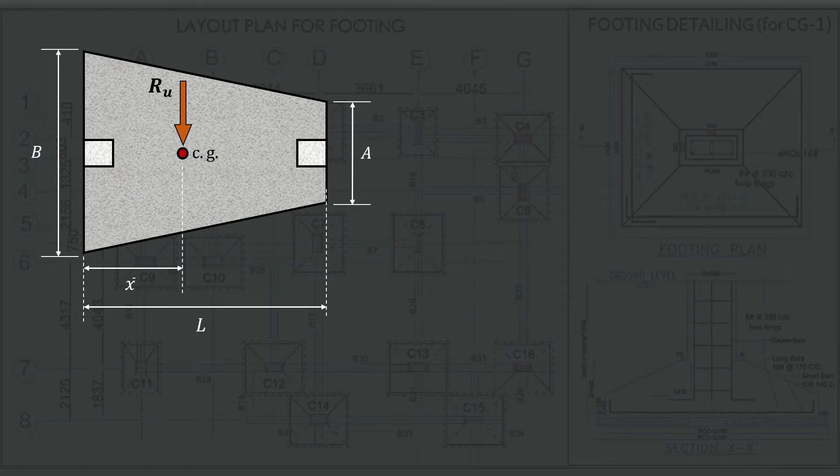We have here a derived formula for the x bar already. The formula for the x bar is simply equal to L over 3 times the quantity (B plus 2A) over (B plus A).

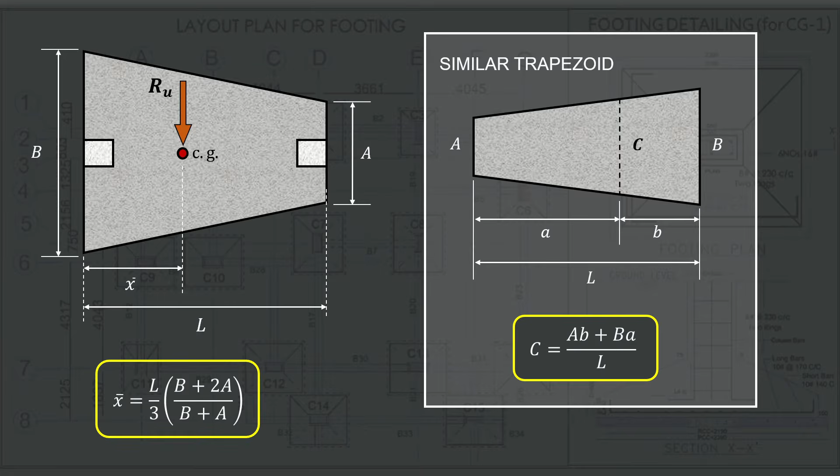And then, just as we have a similar triangle concept, we also have a similar trapezoid for this one. This is the concept behind the similar trapezoid, which we will use for the wide beam calculation and for the calculation of MU later on. We have here side A as the shorter width, and B as the larger width.

For example, let's get a cut section, and call this width C. The value of width C will be equal to A times the opposite side B, plus B times the opposite side A, all over L. So this will be the length C.

Next, for the calculation of QU, it's still the same - RU over the area of the footing. So RU, meaning it has the subscript 'ultimate', so this is the factored resultant.

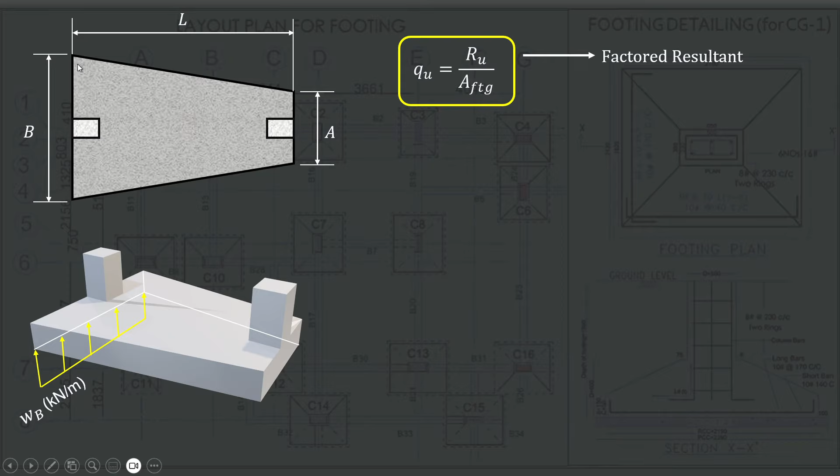For example, this is our isometric view for the trapezoidal footing. We have here what we call WB, which is the uniformly distributed load across width B, so this uniformly distributed load will pass through our side B. And then of course we also have WA, which is a uniformly distributed load that passes through our side A.

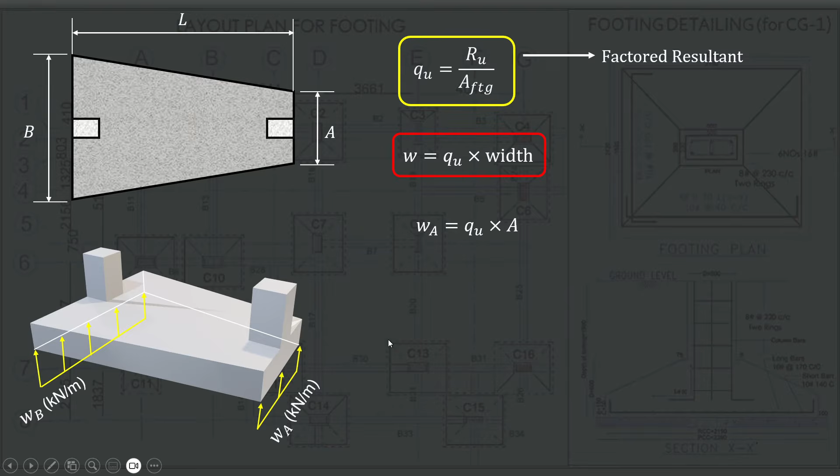To get the value of this uniformly distributed load, we have a formula to use, which is equal to QU times the width it is acting on. For example, for WA, we have QU times the width of A, which is simply side A. And similarly for WB, that is simply QU times B.

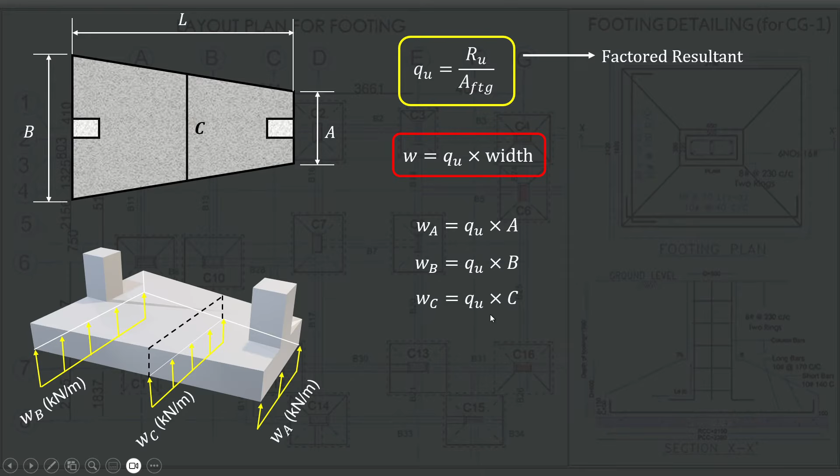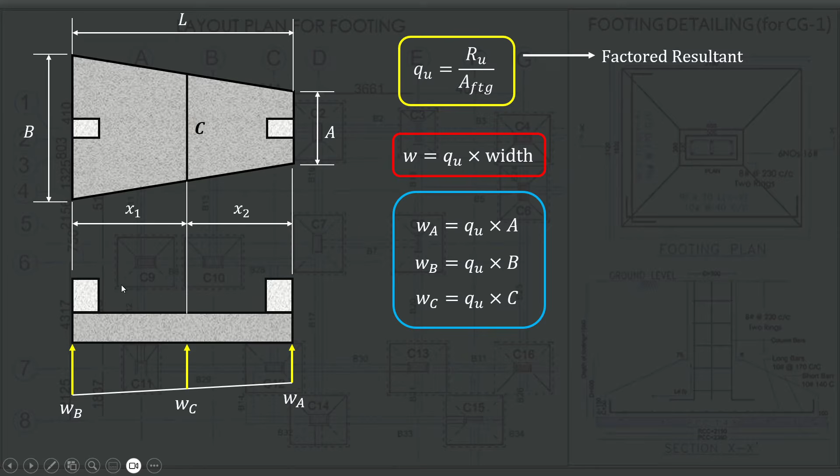Now, to get the resultant force produced by these uniform loads, let's draw a line so we can get the area later. Let's call the distance between WB and WC as x sub 1, and between WC and WA as x sub 2. So we derive here a formula for the forces.

The force that we will be using here is simply equal to the area of the trapezoid. Now, what is this area of the trapezoid? This is not the area of the plan view, our footing - rather, it's the area produced by WB, WC, and WA. For example, consider this area between WB and WC. If we notice, it is actually a trapezoidal shape - WB is one side and WC is the other side, and the distance, its length, will be x sub 1.

So the force produced by WB and WC, let's call it F1, and F1 will be equal to the area of this shape, which is 1/2 times (WB plus WC) times the quantity x sub 1.

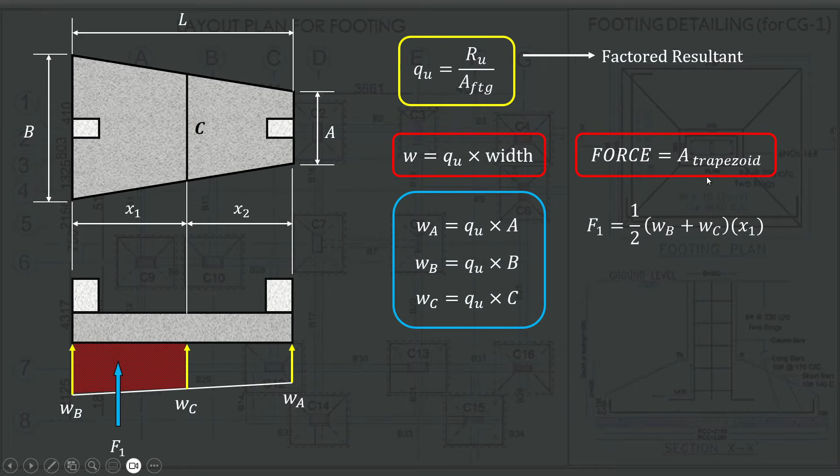That is the area of the trapezoid. So this is the trapezoid being mentioned here, not the area of the footing itself.

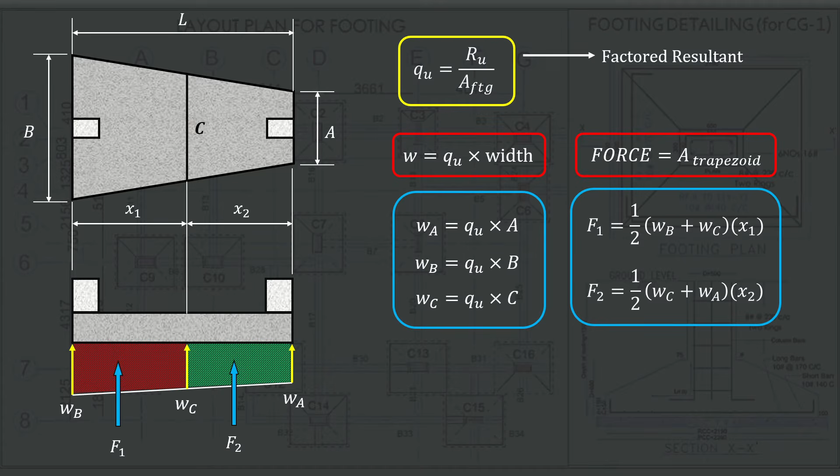Next, we have the other side. The components in this other area are the WC and the WA. Let's call this force number 2, and force number 2 will be equal to 1/2 times (WC plus WA) times X sub 2.

So this is the formula for the forces and the uniformly distributed loads. Be careful - these W's and forces are only used for wide beam and maximum moment. If the question is about punching shear or punching forces/stresses, we don't use this. We go back to the normal pressure, not uniform loads. That's the only difference here.

Example number 2: A trapezoidal combined footing is to be designed to carry the loads PD and PL acting at the center of the columns, which are 4.5 meters apart. Both columns are 400 by 400 mm, F prime is 20.7 and Fy is 276 megapascal. The allowable net pressure is 185 kilopascal. Use effective depth 450 mm. Column 1 has dead load equal to 850 kilonewton and live load 650 kilonewton. Column 2 has 650 and 450 kilonewton dead and live respectively.

Determine: A) the minimum dimension of A and B for the footing. B) factored shear force for the wide beam at column 1. C) the punching shear force acting at column 1. D) the maximum moment acting at the footing.

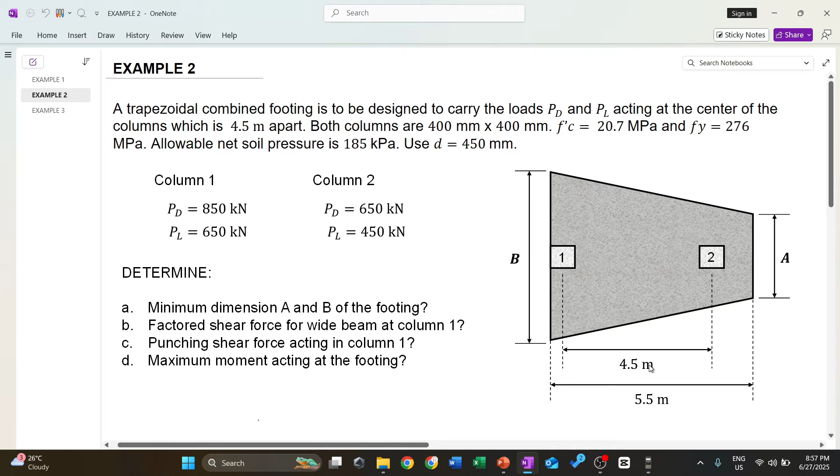So we have here the plan view of the trapezoidal combined footing. Side B here with column 1 adjacent to side B, then column 2 as the interior column. They are 4.5 meters apart and the length of the footing is given as 5.5 meters.

First we rewrite all the loads - the service loads and the factored loads. I already summarized the values here. P1 is simply PD plus PL, that is 850 plus 650, which equals 1,500. For P2, that is 650 plus 450, which equals 1,100 kilonewton. The resultant for the service loads is simply P1 plus P2, which equals 2,600 kilonewton.

Next for the factored loads, P1U - let's add subscript U for ultimate - that is now 1.2 times dead plus 1.6 times live, equal to 1.2(850) plus 1.6(650) equals 2,060 kilonewton. P2U is 1.2(650) plus 1.6(450), which equals 1,500 kilonewton. For the ultimate resultant, that is P1U plus P2U, which equals 3,560 kilonewton.

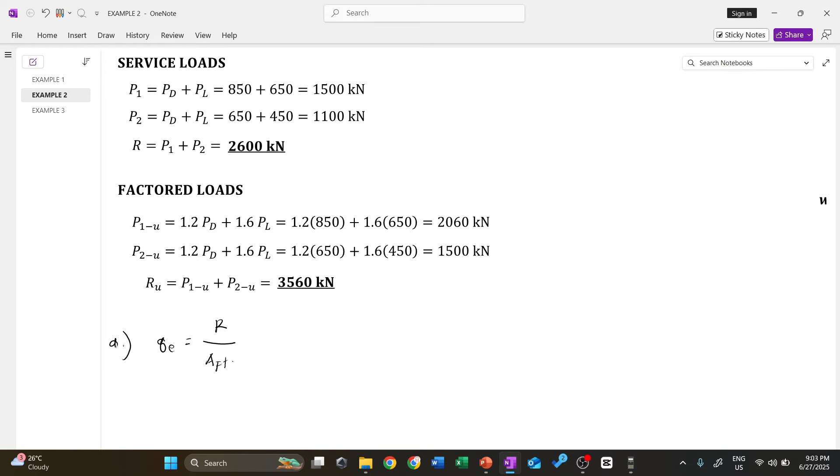Now the question in letter A is the dimensions, side A and side B of the foundation. For the dimension, we need the effective soil pressure. For letter A, we use: effective pressure equals resultant divided by the area of the footing. The effective value is already given, though the word used here is net soil pressure - when we say net pressure, that is effective. So the effective here is simply 185 kilopascal, that's what we'll use.

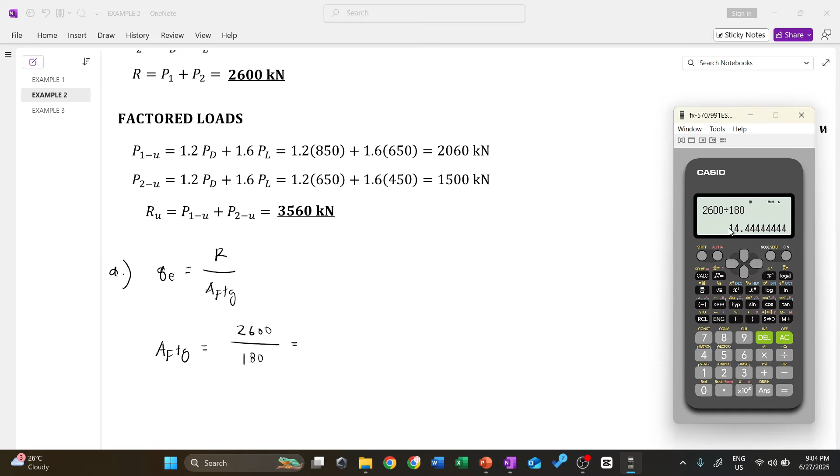That's what we'll use here. And R here must be the service load since it's effective, so 2,600 is what we use - careful, don't use 3,560. So we can now get the area of the footing. The area of the footing is simply equal to R, that is 2,600 divided by the effective pressure, which is 180 kilopascal. The area of the footing is now 2,600 divided by 180, which equals 14.44 meter square.

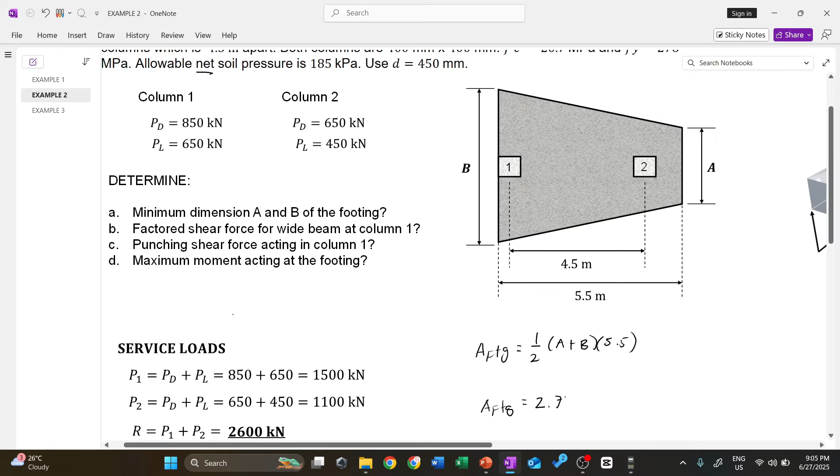Now, what is the area of the footing here? Since this is trapezoidal, we can derive the area of the footing. The area of the footing is simply equal to 1/2 times (Base 1 plus Base 2) times the length. Let's call Base 1 as A, Base 2 as B, with a length of 5.5 meters. So we can say the area of the footing is equal to (A plus B) times 5.5, divided by 2. Simplifying, divide 5.5 by 2, we get 2.75. Distributing inside: 2.75A plus 2.75B. So this is our area of the footing.

Now we can equate this. So 14.44...

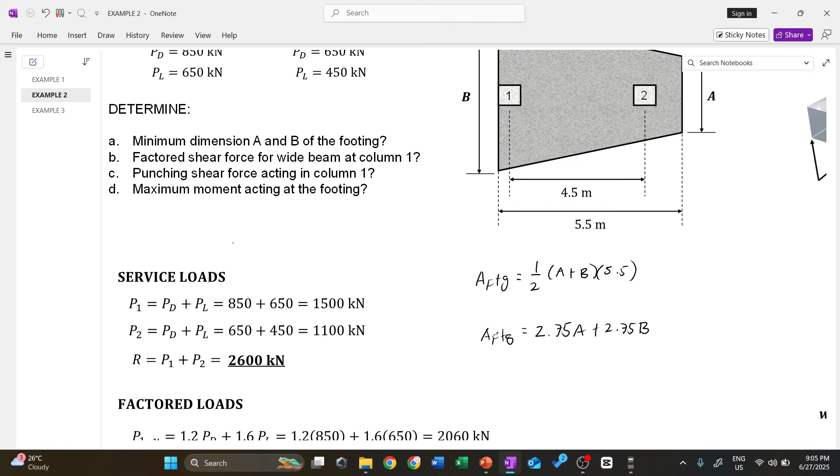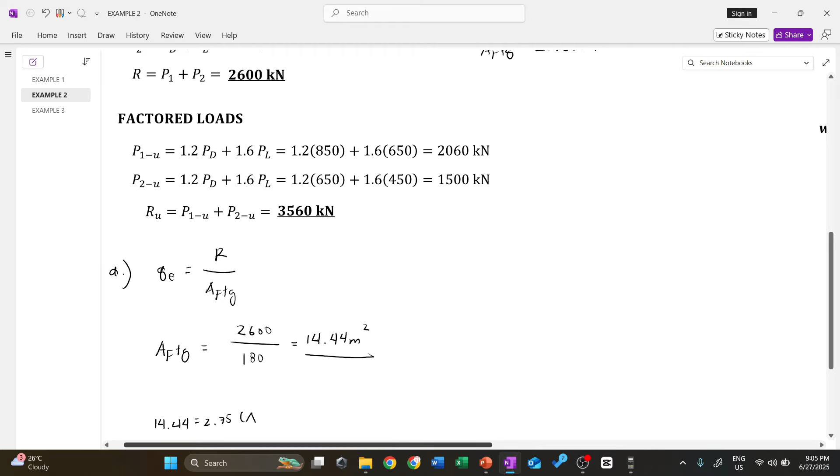14.44 is actually equal to 2.75, or let's isolate A plus B first. Now, we can simplify this further by dividing 14.44 by 2.75. So we get 5.25 here.

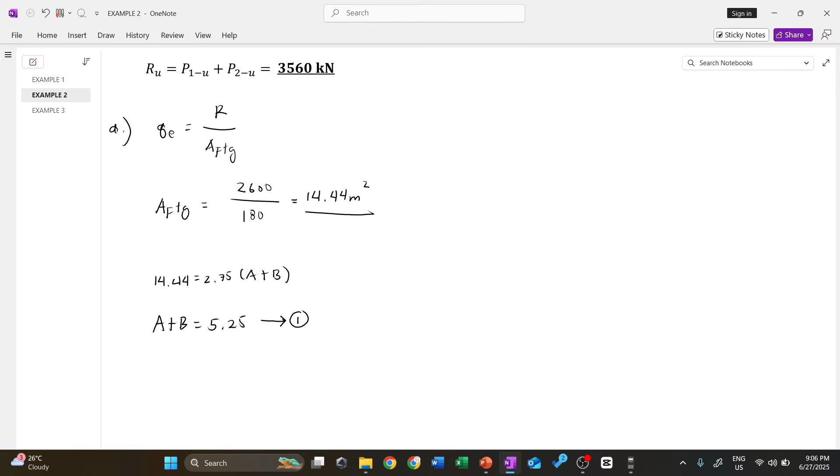Now for the next equation, let's recall the distance of our resultant from a reference. So again, if we have a resultant, the distance of this resultant from the larger side, side B, is what we call x-bar. And our derived formula here is simply L over 3 times the quantity B plus 2A, over B plus A. This is what we'll use.

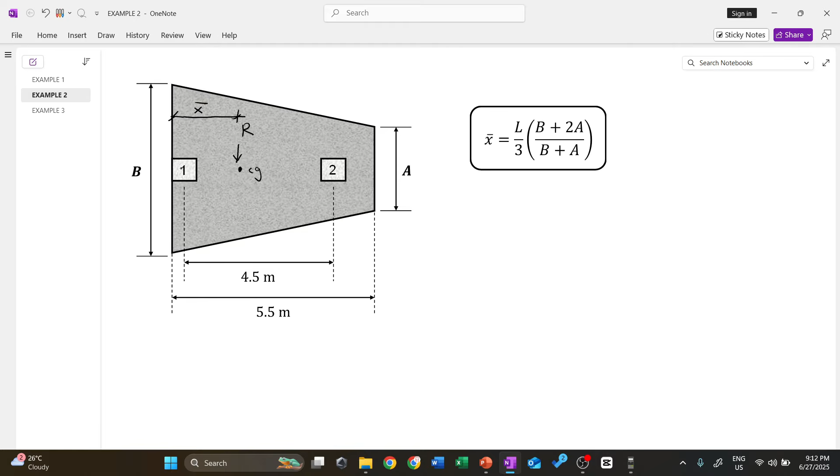Now what's the purpose of this? Remember that at the center of column 1, we have P1, and at the center of column 2, we have P2. So the purpose of our x-bar here is that the moment of the resultant, that is resultant times x-bar, meaning our reference here at side B, must be equal to the moments produced by the two axial forces. Meaning P1 times its distance from the reference.

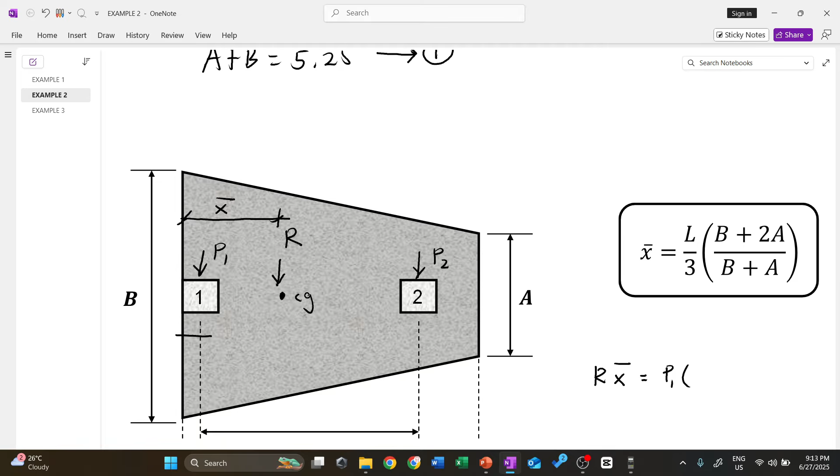Again, if you remember, the column dimension is 0.4 by 0.4, so this one is 0.2 meters. So that is P1 times 0.2, plus for column number 2, its axial load P2, its moment arm from our reference is simply 4.5 plus 0.2, or 4.7 meters.

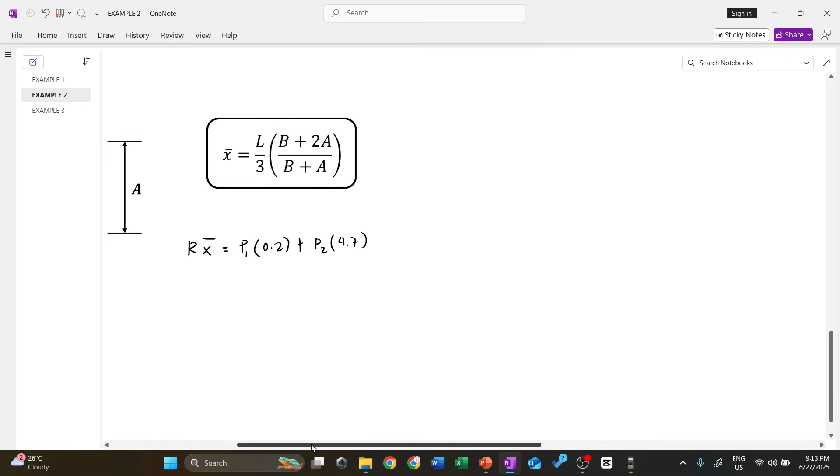So that's what this means: the moment of the resultant is equal to the moments of our axial loads. So our R here is the service load, that is equal to 2,600, times our x-bar which is equal to L over 3.

Our L here is 5.5, divided by 3, times B plus 2A over B plus A -- that's still unknown. And this is equal to our P1. The P1 here is simply equal to 1,500 and P2 is 1,100.

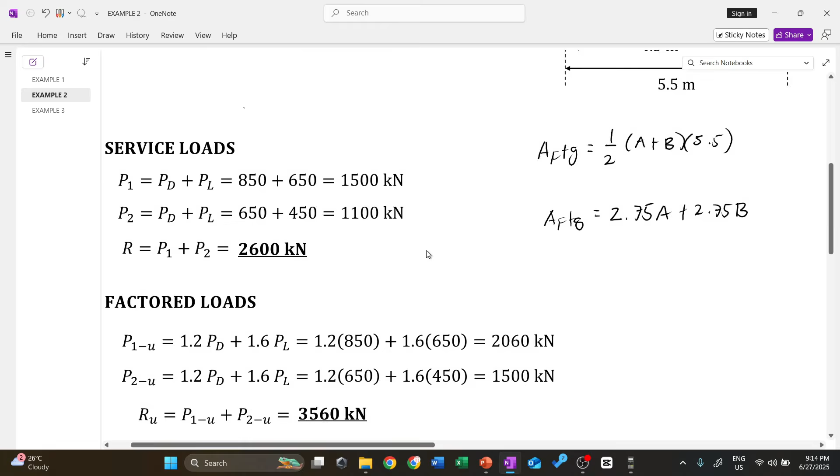So P1 is 1,500 times 0.2 plus 1,100 times 4.7. We can simplify this further. Let's leave B plus 2A on the left side of our equation.

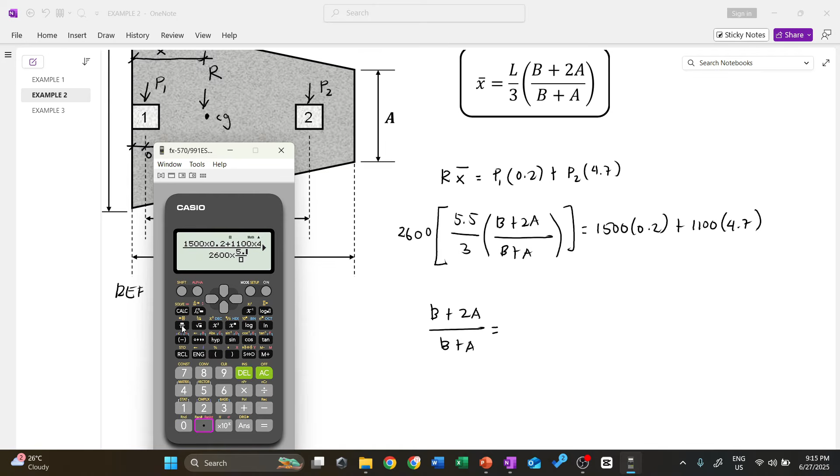B plus 2A over B plus A, and this is equal to -- let's simplify the right side. That is 1,500 times 0.2 plus 1,100 times 4.7, all over 2,600 times 5.5 over 3. So we get a value of 1.148.

And then let's expand this further, let's simplify it more. We have B plus 2A is now equal to 1.148B plus 1.148A. So let's combine these.

Let's move the terms on the right to the left instead. Let's take A first: 2 minus 1.148, that is now equal to 2.148 -- wait, we have 0.852A. Then next, B minus 1.148, so we have negative 0.148B, and this is equal to 0.

Let's call this our equation number 2. So we now have equation 1 and equation 2. We can now use these two equations in our calculator's two-unknown equation solver.

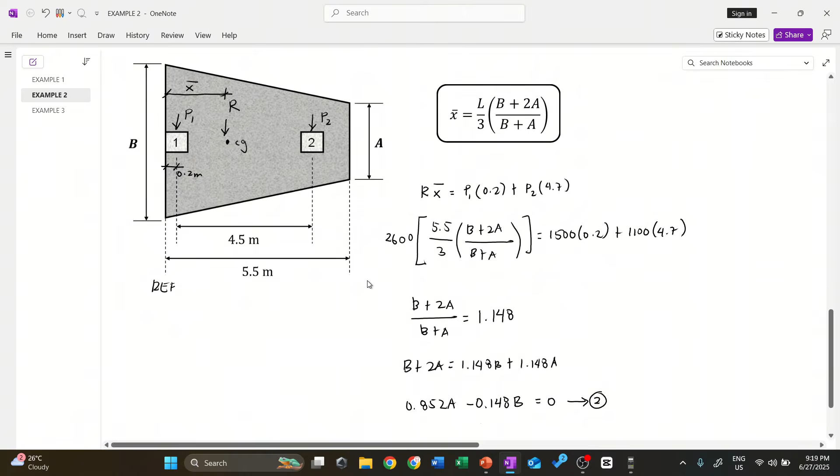So, mode, equation, then 1. First, we have 1, then our C is equal to 5.25 -- it should be equated on the right side. And then here, we have 0.852 and negative 0.148, and then 0 for the C. Let's equate these.

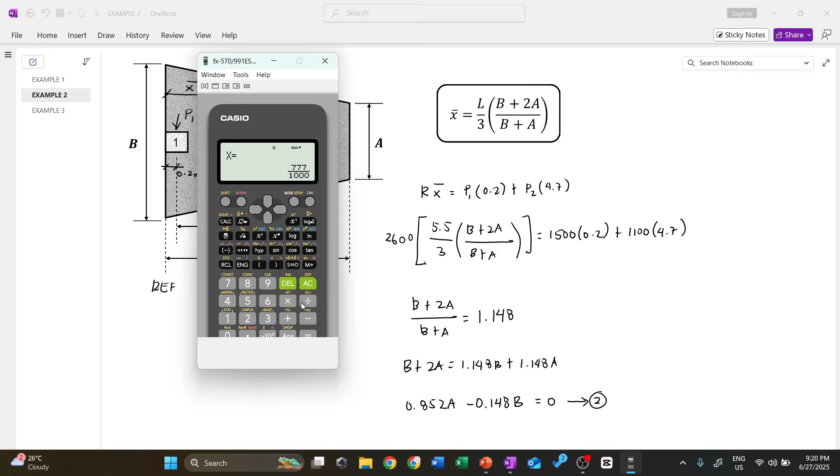So we now have side A equal to 0.777 meters, and for side B, we have 4.473 meters. But we don't want it to look like this, so we can round off to 0.8 meters, and this one we can say is 4.5 meters. So this is what we'll adopt as the answer for letter A.

Okay, next, letter B: the factored shear force for the wide beam at column 1. So when we say factored shear force, since it has the word factored, what we'll use here should be factored loads too. So it's the VU that will be produced by the factored loads under the foundation.

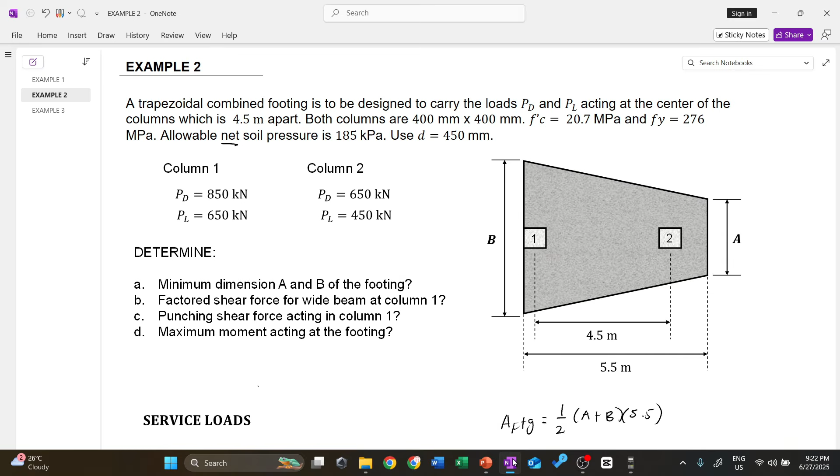Again, for the wide beam force or stress in our trapezoidal combined footing, this is what we'll do. This is what it should look like -- we need the WB and the WC here, and of course, we still need the P1 here, it should still be visible.

Acting on it. So for example, this is cut off because of the wide beam force or wide beam stress. Again, because this is a wide beam, we'll measure this by distance D from column number 1, since that's what's being asked here.

And then yung D distance natin dito, say for example, meron tayo ditong magiging width na C. So ito na yung width C natin para sa ating trapezoid for the wide beam. So what is the value of C? Take note that the value of C is simply equal to A times its opposite side na B, plus B times its opposite side na A, divide this by the length.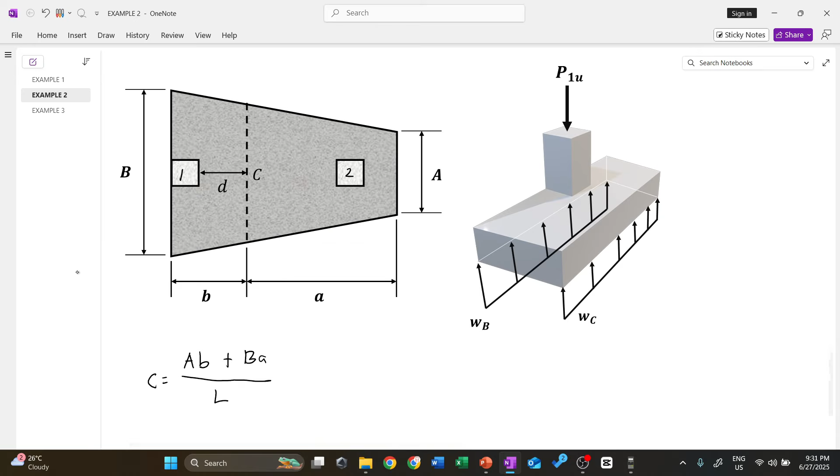Yung C natin dito ay hindi pa natin alam, pero pwede naman tong masolve. Yung B natin dito, nakalculate na natin as 4.5. Yung side B natin ay 4.5 and then yung side A natin ay 0.8 meters. And then what is side B? What is this small side A naman dito?

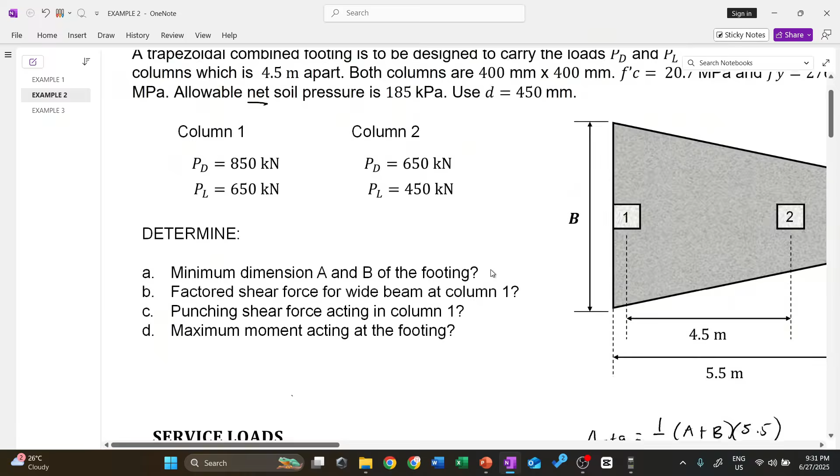Remember that the column dimension is 0.4, and the effective depth is already given. So the effective depth here is 450 mm or 0.45. Kung meron tayo ditong 0.4 and then another 0.45, side B is actually equal to 0.85. This is the smaller side. And kung 0.85 na yan, yung naiwan na lang kay side A is of course 5.5 minus 0.85. So for side A, meron tayo dito na 4.65 meters. Kompleto na ito, pwede na natin kunin yung side ni C.

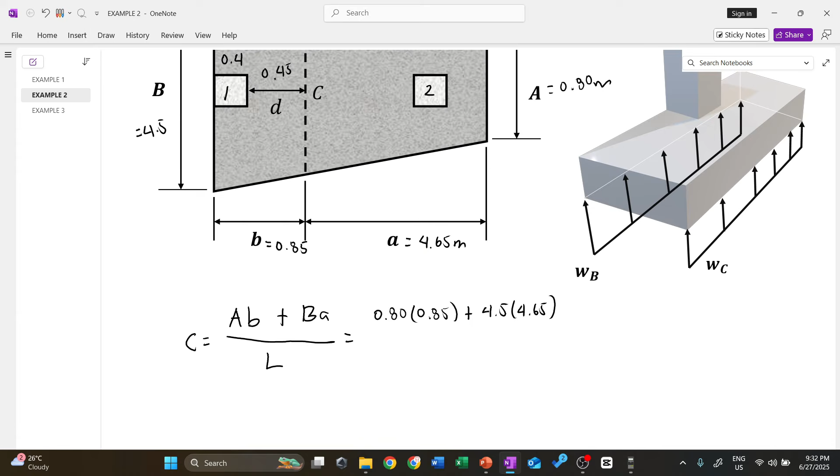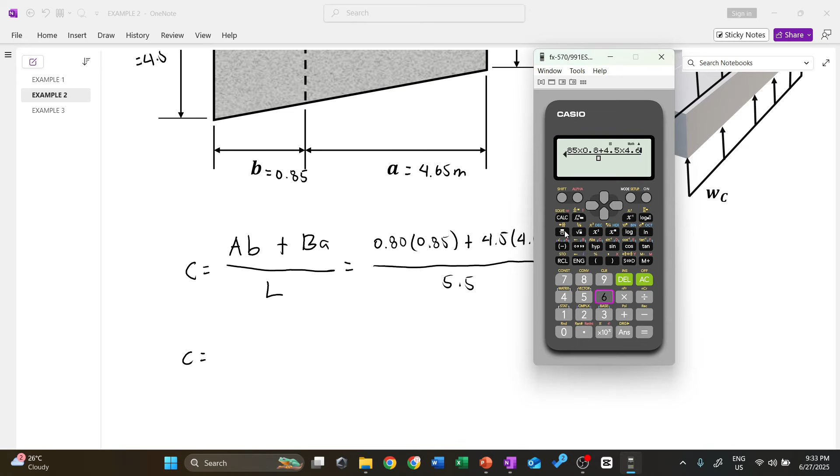So C natin is 0.8 times 0.85 plus 4.5 times 4.65, divide this all by 5.5. Side C is equal to 0.8 times 0.85 plus 4.5 times 4.65, then divide this by 5.5. That gives us 3.93 meters. So this will be our side C.

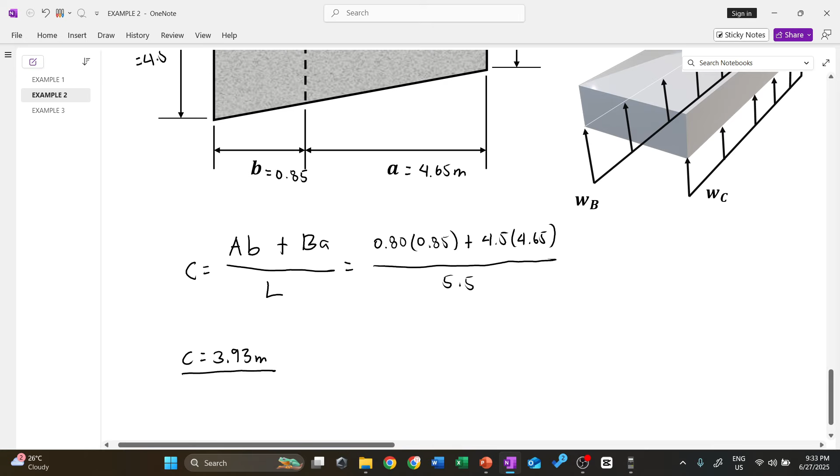Kung meron na tayong side C, pwede na natin kunin yung mga WB and WC. Para masolve natin yung WB and WC, we need the pressure ultimate muna. So QU is equal to RU divided by the area of the footing. So what is our RU here? The RU is 3560 kilonewton.

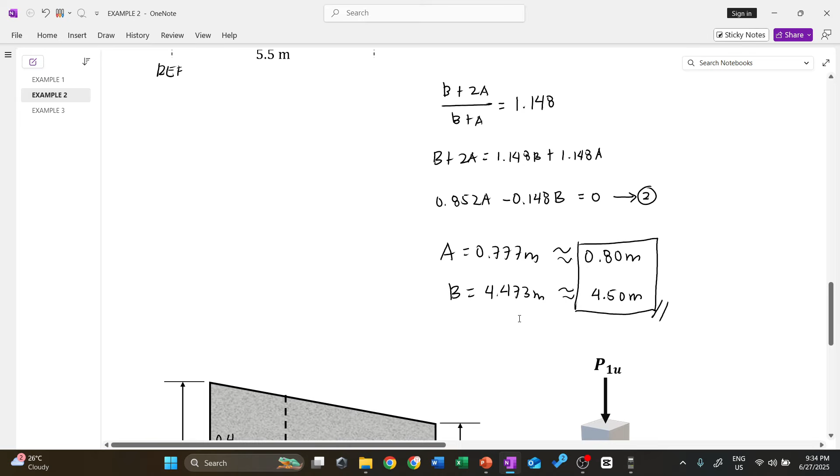Hindi yung 14.44 yung gagamitin natin, rather yung na-derive na natin na bagong dimensions using 0.8 meters and the 4.5 meters na sides. Kasi kung 14.44 yung gagamitin natin, maliit na yan. 1/2 times yung side A natin na 0.8 plus yung side B natin na 4.5, and then with a length of 5.5. Ito yung magiging bagong area natin using the new dimension or the rounded dimension. So yung QU natin dito ay simply equal to 3560 divided by 0.5, 5.5 times 0.8 plus 4.5.

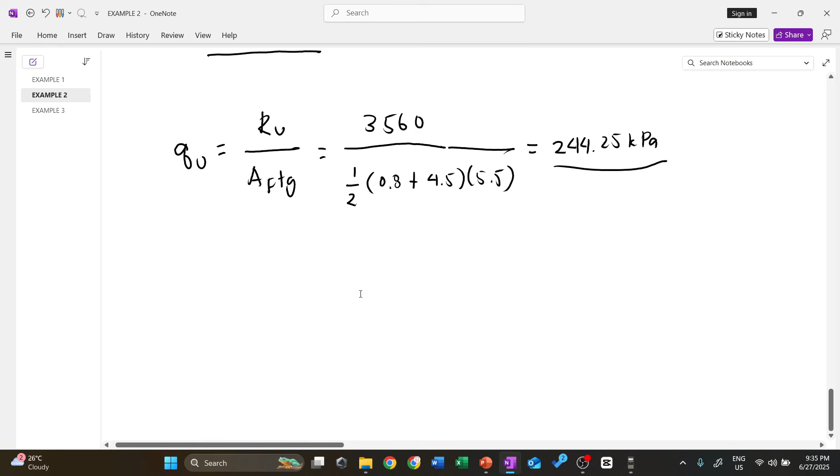That gives us 244.25 kilopascal as our QU. So finally, pwede na natin kunin yung values ni WB and ni WC. Dito na lang siguro. So WB here is simply equal to QU times the side B. Then WC naman ay QU times the side C.

So 244.25 times yung B natin dito is 4.5 meters. Meron tayong uniformly distributed na 244.25 times 4.5. So we have here 1,099.125 kilonewton per meter.

For the side C naman, or the WC, we have here 244.25 times yung side C natin na 3.93. So we have here 959.9025 kilonewton per meter. Meron na tayo ditong mga WB and WC.

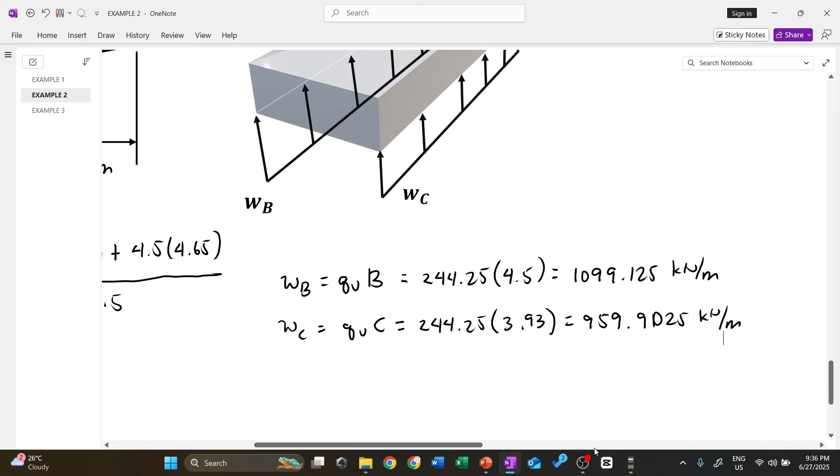Para makuha na natin yung factored shear force for the wide beam near the column number 1, ito yung mga kailangan natin na mga figures. Nire-write na natin dito yung values ni WB and WC. Meron tayo dito nung kanyang elevation view naman. Para makuha natin yung VU produced by this cut, meron tayo ditong lalabas na VU. Ito yung tinatanong na factored shear force for the wide beam.

Para makuha yan, kailangan din natin muna ng resultant nitong mga pressure natin or itong mga uniform loads natin sa ating pundasyon. Meron tayo ditong resultant nitong WB and WC. Tawagin natin yun as the force F na lang siguro. Now, to solve the VU produced by this section, we have summation of forces vertical equal to 0. Lahat ng upward forces ay equate lang natin sa mga downward forces. From this one, we can say that yung mga upward natin ay yung VU and the F, and yung downward ay yung P1U.

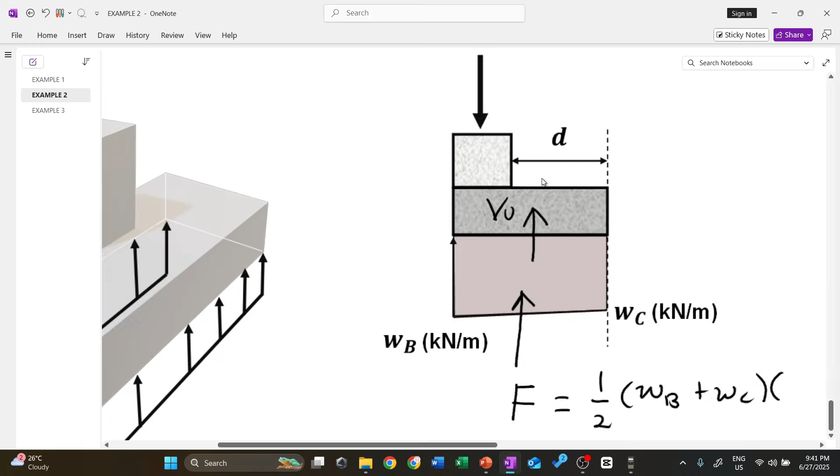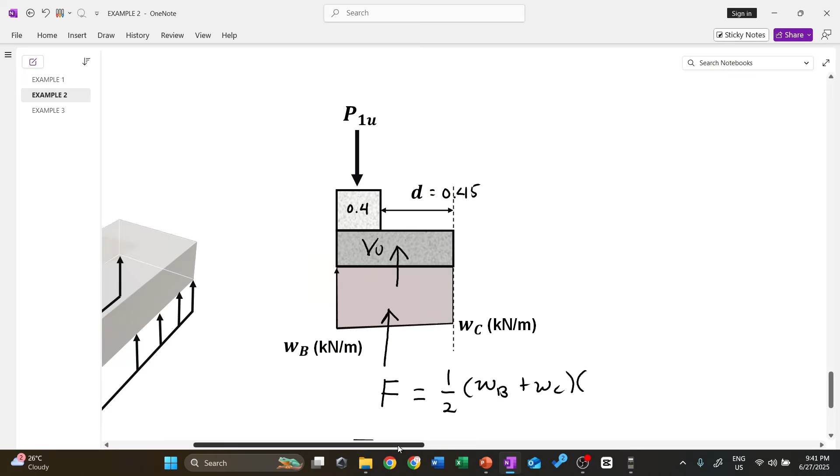Rewrite natin dito, VU plus the F is actually equal to the P1U. Now, ano yung value naman nitong F dito? F dito, if you remember, this is simply the area of the trapezoid. Ano yung trapezoid? Yung trapezoid na nabubuo ni WB and ni WC. This is simply equal to 1/2 WB plus WC times yung kanyang distance na 0.85. Meron tayo ditong column dimension na 0.4, tapos yung ating effective depth na 0.45. So meron tayong width na 0.85. Yun lang yung times natin dito, 0.85.

Now, solving for F, this is equal to 1/2 times WB natin na 1099.125, WC natin na 959.9025, times yung distance natin na 0.85.

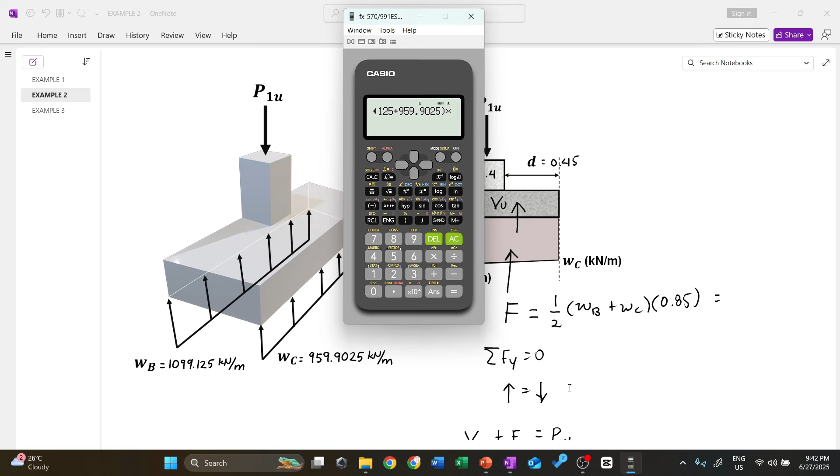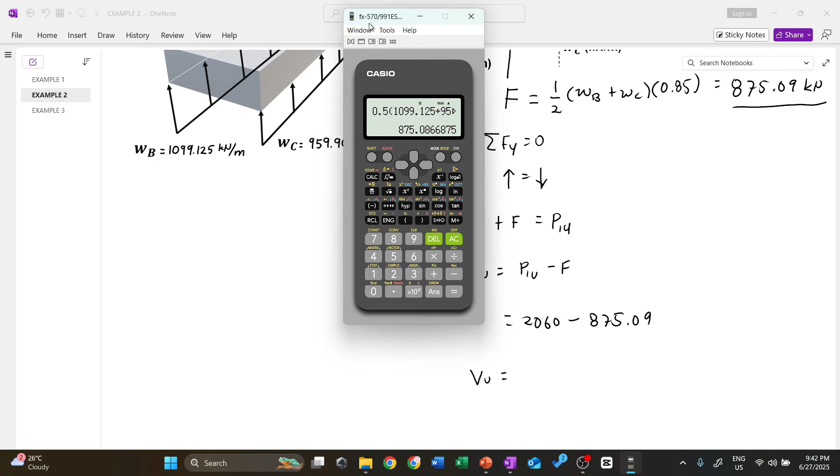875.09 kilonewton. So para ma-solve natin yung VU, this is now equal to P1U minus F. Yung P1U natin ay 2060 kilonewton minus 875.09. Ang ating factored shear for the wide beam ay simply equal to 2060 minus the answer, meron tayo ditong 1184.91 kilonewton. Ito na yung sagot natin for letter B.

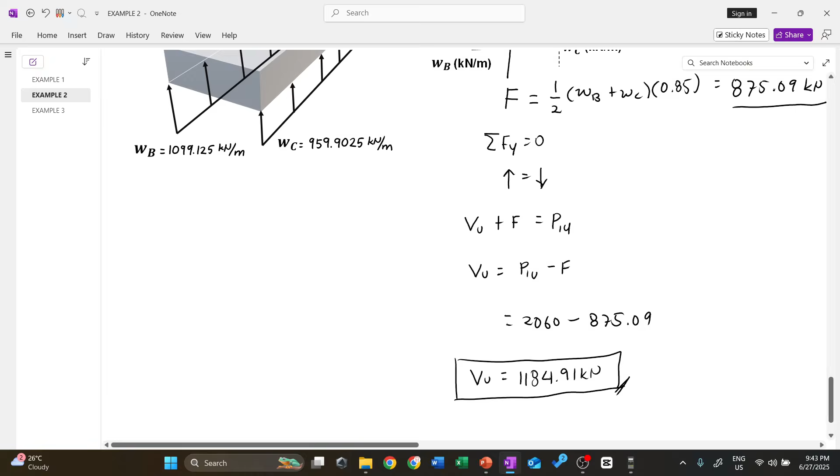Next, what is the punching shear force acting in the column number 1? Alright, for the punching naman, ganito na yung mangyayari dito sa ating trapezoidal footing. Dahil column 1 pa rin naman, so magsukat lang tayo ng d/2 distance all over the faces of the column number 1. Kung mapapansin natin, ang column 1 ay adjacent to the property line, so wala nang masisira dito sa point na to. Hanggang dito lang yung masisira, D/2 from the 3 faces.

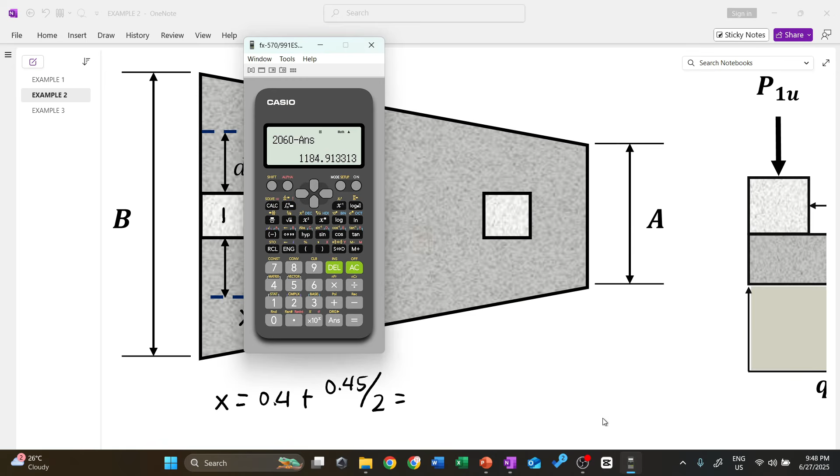Tawagin na lang natin itong mga x distances or x dimension, and this one as our y dimension. Yung value ng x dito is simply equal to column dimension 0.4 plus D/2. Yung D natin again ay 0.45 meters, then divide this by 2. So yung x natin dito is simply equal to 0.4 plus 0.45 divided by 2, meron tayo ditong 0.625.

0.625 meters. At para sa y naman, meron tayo ditong D/2 and then D/2 sa baba, so that is actually dalawang D/2, plus column dimension which is 0.4. Cancel na dito yung ating 2, so D is 0.45 plus 0.4, or this is equal to 0.85 meters.

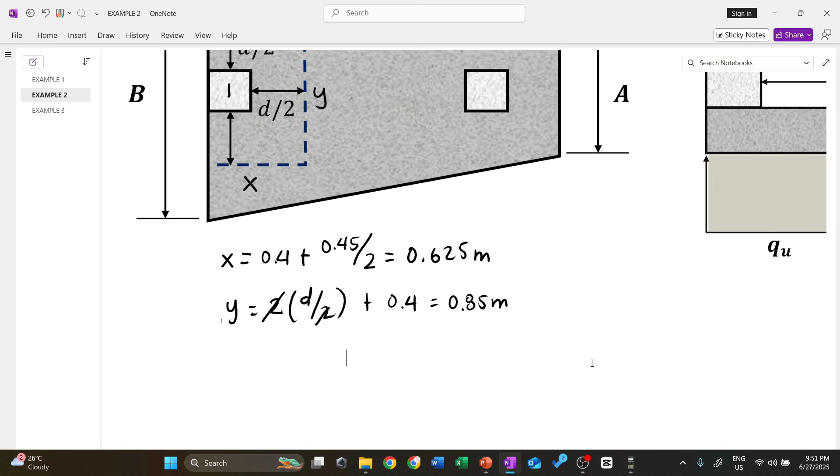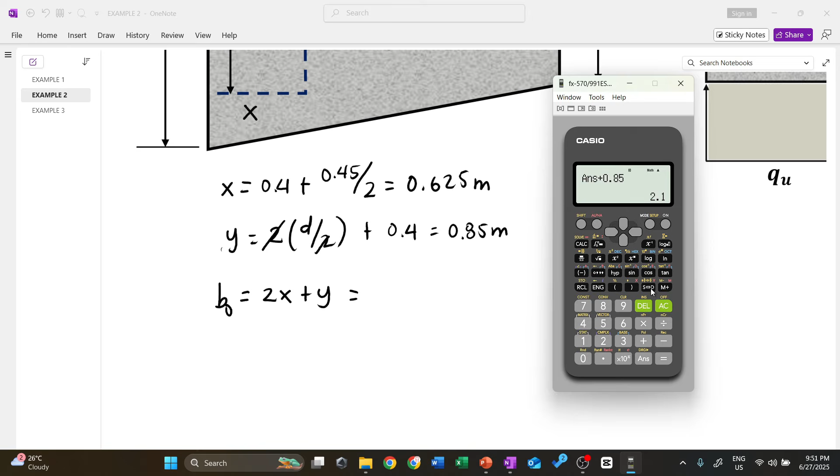Then finally para sa perimeter naman, that is BO, meron tayo ditong dalawang x sa baba, x sa taas, then plus y. Ang perimeter natin para dito ay simply 2x plus y. So this is 2 times 0.625 plus 0.85, times 2 lang natin ito, plus 0.85. So we have here perimeter equal to 2.1 meters. Ito na yung section na masisira because of the punching.

Dahil punching na to, yung pressure natin dito ay magiging ganito ulit, hindi na yung uniformly distributed na W. Yung pressure dito sa ilalim ng pundasyon natin ay equal to a uniformly distributed na pressure, QU. Kung we remember, yung QU natin ay merong magnitude na 244.25 kilopascal. So ano yung mangyayari dito na VU? Remember, this is equal to 244.25 kilopascal.

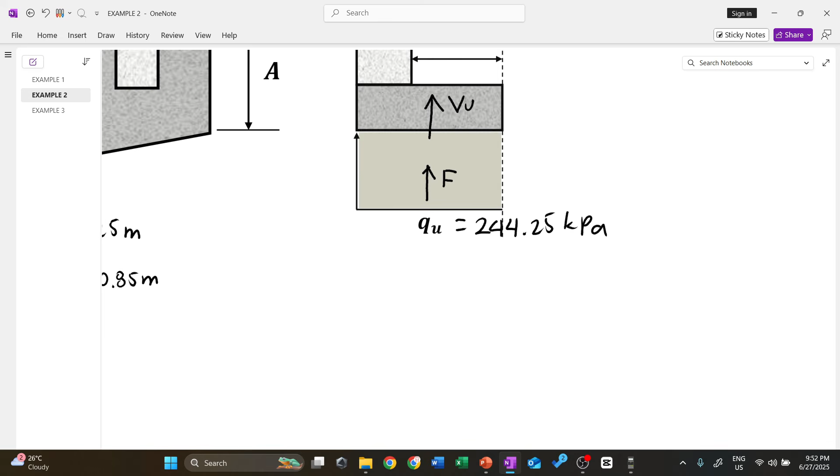Para makuha natin yung VU, tawagin na lang natin yung VU natin is somewhere here ulit, and then yung resultant naman ni QU, tawagin din natin ito na F. Wag po tayong malito, no, iba yung VU dito na nangyayari. This is the net between the P1U and the F, so yun yung tinatanong dito na punching shear force. Ang F here ay simply the resultant of the pressure QU. Solve muna natin siguro dito what is the F.

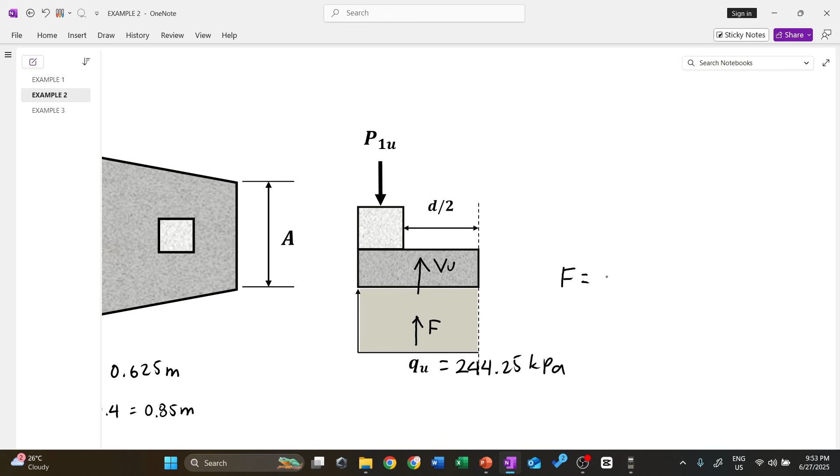F here is simply equal to QU times the area. Ano yung area na ita-times natin? Of course, the area na nasira, yung nasira na area dito is simply this one, that is X times Y. Kaya F natin dito is simply QU times X times Y. Meron na tayo dito ang F na 244.25 times X natin na 0.625 times Y natin na 0.85. F natin here is equal to, so 244.25 times 0.625 and 0.85 gives us 129.76 kilonewton.

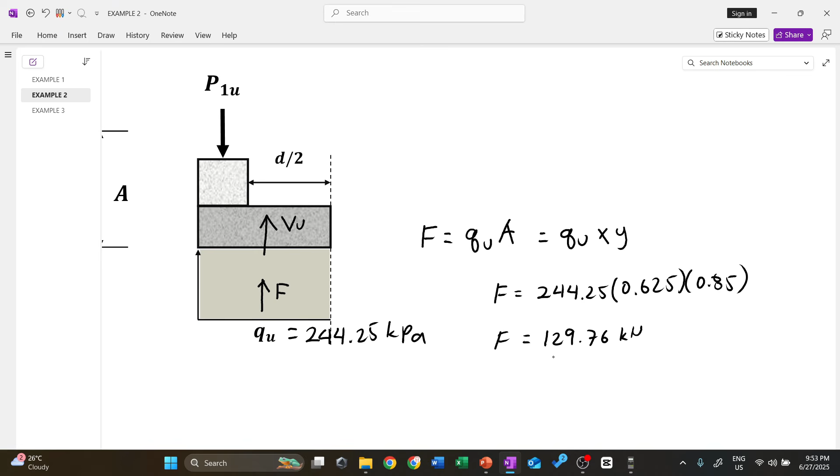For the VU, that is simply equal to summation forces vertical ulit tayo, or diretso na lang natin. VU is simply equal to the net between P1U and the F. Yung P1 dito, siya yung laging mas malaki ang value, so P1 minus F. This is 2060 minus 129.76.

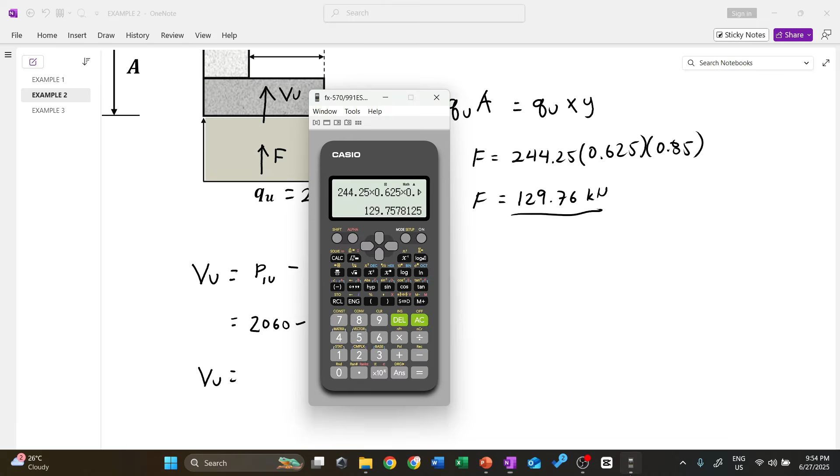Now, our VU here is simply equal to, i-minus na lang natin dito, 2060. Okay, so meron tayo ditong VU na 1930.24, positive lang natin, 1930.24 kilonewton. So, this is actually the punching shear force of this footing.

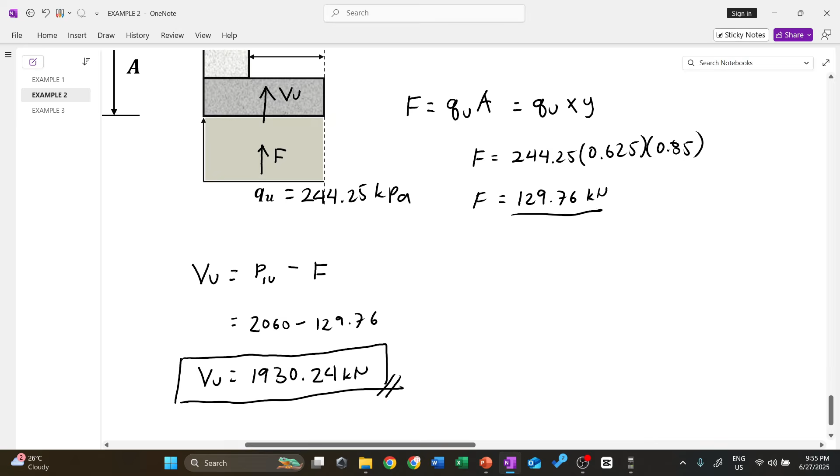Okay, last one, what is the maximum moment acting at the footing? Para naman makuha natin yung maximum moment, kailangan lang natin dito mag-cut ulit. So dun sa cut natin dito, dapat lalabas doon yung shear equal to 0. Kung nasaan yung shear 0, dapat nandoon yung maximum moment.

Let's say for example, x distance yung location ng maximum moment dun sa ating side B. Dun sa cut natin, meron tayo dito maproproduce na side D. So again, dun sa cut natin dito, dapat yung shear natin dyan ay 0. Para makuha natin yung magnitude nitong x, kailangan lang natin dito tignan yung mga forces natin.

Again, yung forces natin dito ay dapat mga W na ulit. For wide beam and moment para sa trapezoidal na foundation, kailangan natin ng mga uniformly distributed load. So kung meron na tayo ditong P1U, say for example, yung resultant ng WB and W ay tawagin na lang natin na F. So that is the resultant of this force.

Taking forces vertical equal to 0, pwede nating sabihin na ang VU natin dapat ay equal to the net of the P1U and then the F. So this is equal to P1U minus the F. Yung VU natin dito is equal to 0. So P1U minus F must be equal to 0. Or pwede rin nating sabihin that P1U is equal to the F. Okay, so ito yung magiging working equation natin.

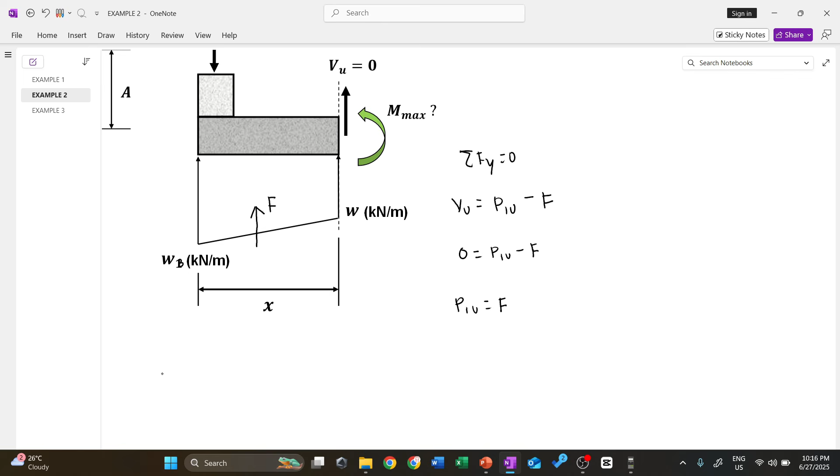Now, ang problema natin, ano ba yung value ng F dito? The value of the F is simply equal to 1/2 WB plus the W times the X here. Yung WB natin dito, meron na tong value kanina. At yung ating W naman dito ay wala pang value, kasi this is unknown.

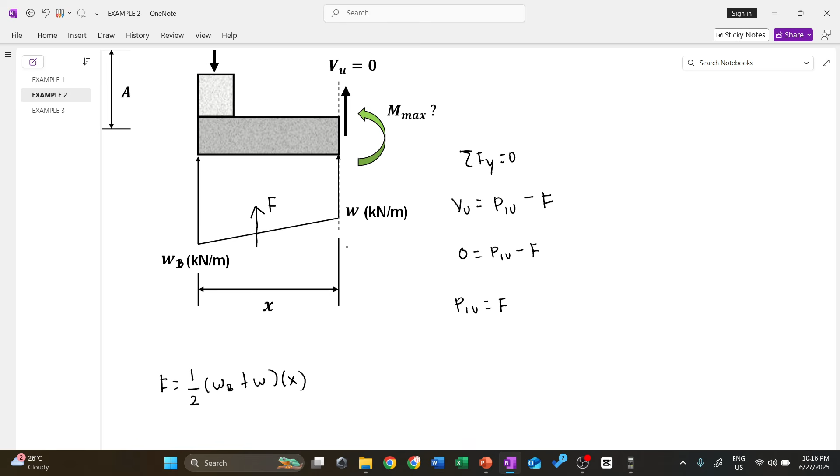So, para makuha natin yung value ng W dito, kailangan natin munang malaman ano ba yung side D natin dito. Now, to solve the side D, this is simply equal to side A times x plus side B times 5.5 minus x, all over 5.5.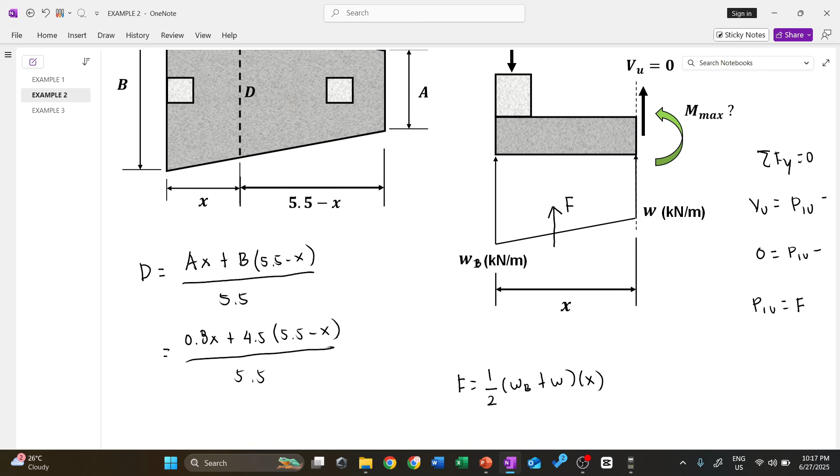So, meron na tayong value ni A and ni value ni B. Okay, so expand lang natin ito. This is now 0.8x plus 4.5 times 5.5 minus x all over 5.5. Pwede pa natin tong i-simplify yung nasa taas. Pwede natin pagsamahin yung x together and then yung constant natin.

Now, D is equal to, yung ating mga x dito, we have 0.8 and then kung i-distribute natin yung 4.5 doon sa loob, magiging negative 4.5x. 0.8 minus 4.5, so we have negative 3.7x. So minus 3.7x plus 4.5 times 5.5, which is 24.75, all over 5.5. So, ito na yung value ni D in terms of the x.

So, ano yung purpose nito? Malalaman na natin actually yung value ni W dito. Again, ang formula natin for the W is simply equal to the QU times the width, which is the D. QU times the D. Again, yung QU natin dito ay 244.25.

Times lang natin ito ng negative 3.7x plus 24.75 all over 5.5. So, pwede na nating i-simplify pa itong W natin in terms of x. Distribute lang natin itong 244.25 times negative 3.7 over 5.5. So, meron tayo ditong negative 164.31x, tapos yung nasa loob pa ng mga constant, 244.25, palitan lang natin yung numerator natin ng 24.75.

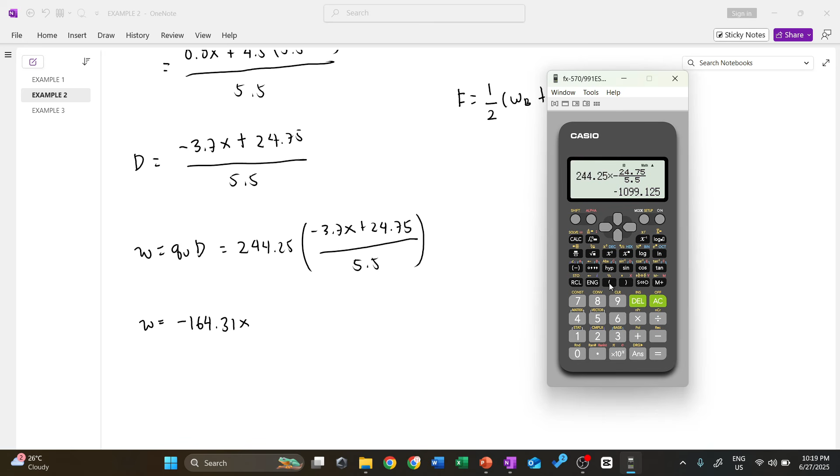Okay, so we have here, so positive pala to dapat. Positive lahat, so tanggalin lang natin yung negative sign dito. So that is 1099.125 plus 1099.125. So ito na yung ating magiging W dito.

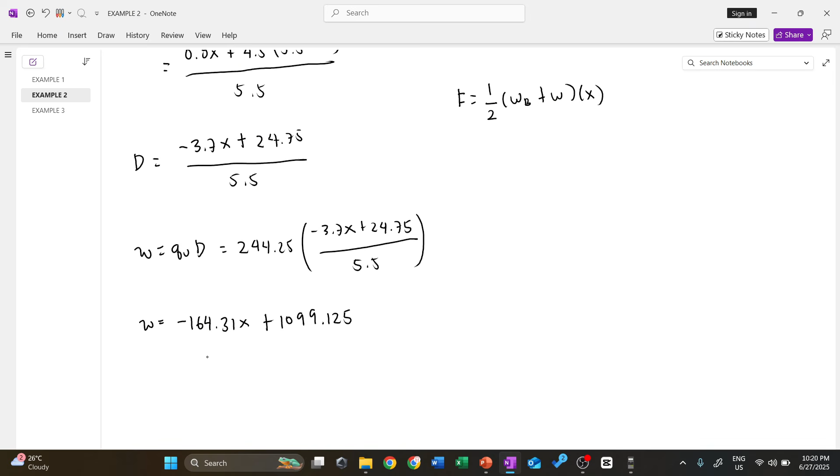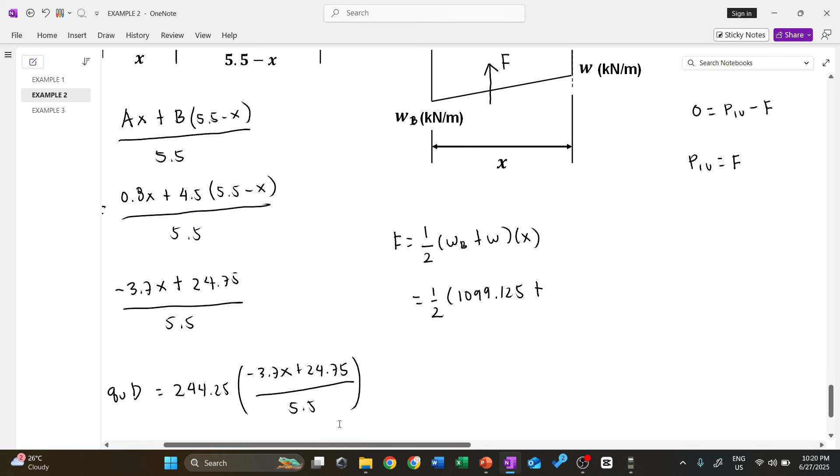So pwede na natin tong i-substitute dito para sa ating F. So we can now have 1/2 WB natin ay 1099.125 plus yung W natin. Yung W natin dito is negative 164.31x plus 1099.125. Unahin ko na lang dito yung 1099.125 and then minus 164.31x. Then, multiply this again by x dito sa ating labas.

Okay, and then simplify this further. F is equal to, so yung nasa loob, i-plus lang natin 1099.125 times 2 natin yan, and then i-divide natin ulit ng 2. So magiging 1099.125 lang din yon. Tapos i-times natin dun pa sa may x dito sa labas. So meron tayo ditong 1099.125x.

Then next, yung nasa loob, negative 164.31, i-divide natin siya ng 2. Okay, divide lang natin ito ng 2. So we have 82.155.

82.155. Then meron tayong x sa loob times x sa labas, so magiging x square. So ito na yung ating f. Now pwede na natin gamitin yung ating equation kanina na P1U is equal to F. Recall natin na yung P1U natin ay 2060, and this is equal to 1099.125x minus 82.155x square. Finally, pwede na nating isolve dito yung ating x.

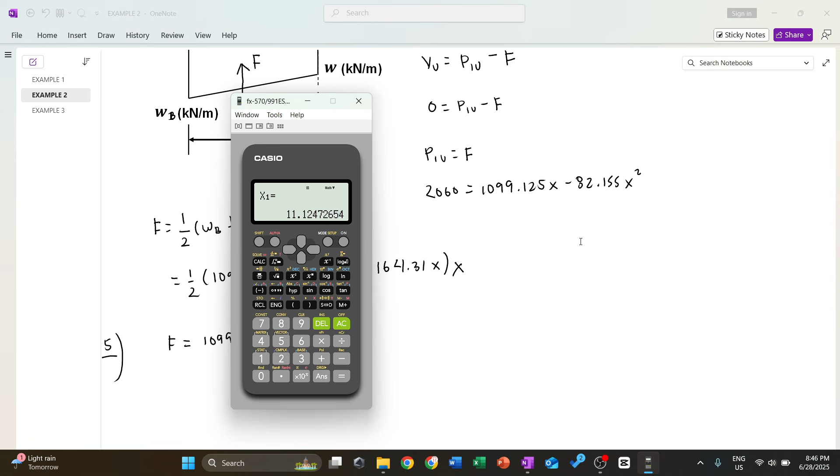Finally, meron tayong x sub 1 na 11.12 at x sub 2 na 2.25 meters. So of course, between the two, ang pipiliin natin na value ng x ay yung 2.25. Kung yung 11.12 kasi, ang ibig sabihin nito, lagpas ka na dun sa ating pundasyon. Yung total na haba lang ng ating pundasyon ay 5.5. So kung x sub 1 ang ginamit mo, mali na yon. 2.25 yung value ng x natin.

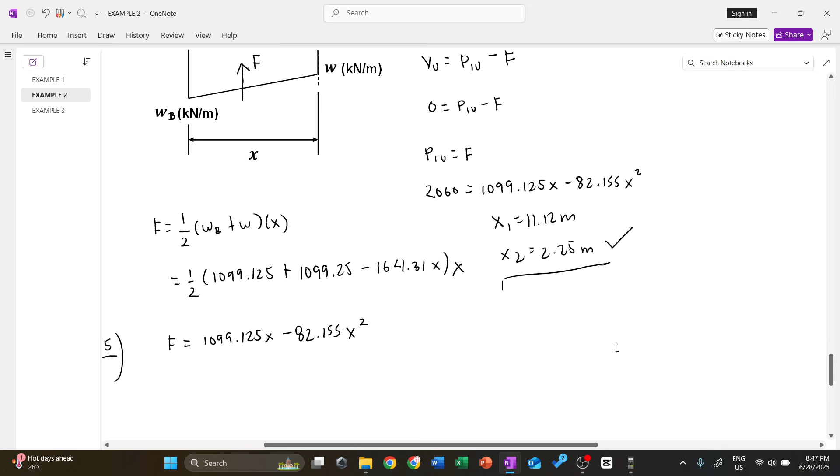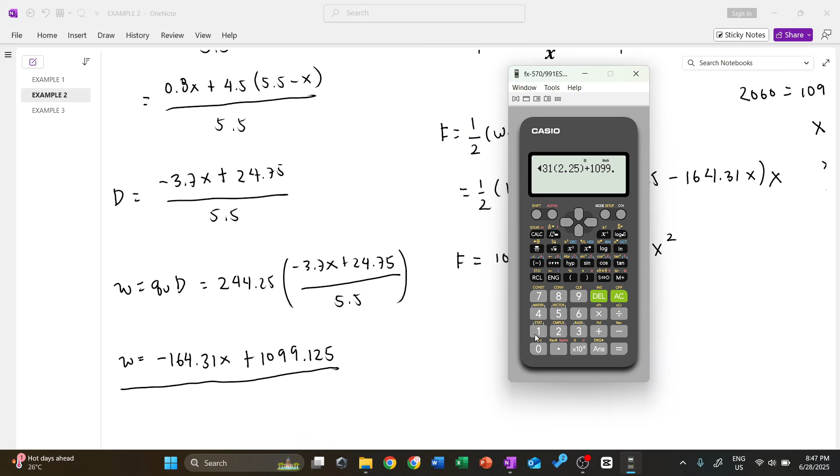Dito, yung shear equal to 0. At isolve na rin natin dito yung value nitong ating W. In terms of x naman, ito kanina pa. Solve natin yung magnitude nitong W natin. This is negative 164.31 times yung x natin na 2.25 plus 1099.125, equal to 729.43 kilonewton per meter.

Now, finally, pwede na natin kunin dito yung magnitude ng ating Mmax. Dito, yung ating pressure, breakdown na natin. Yung trapezoidal, ginawa nating 2 shapes: meron tayong rectangular at yung triangular na shape. Kung trapezoidal kasi ito, hindi natin alam agad yung magiging moment arm natin. By breaking this down, mas mapapadali tayo dito.

Ang Mmax natin dito is simply equal to, we take moments from shear equal to 0 and this must be equal to 0. So magmo-moment tayo dito sa ating shear equal to 0 na location. Say for example, all the clockwise must be equal to the counterclockwise moments. Sino yung mga clockwise moment dito sa ating shear equal to 0? Una dito, ipasok na natin si F1. Si F1, meron siyang moment arm na kalahati nitong x, so we have here x over 2.

Then next, meron tayo ditong F2. Si F2 naman ang kanyang moment arm, since ito ay triangular, andito yung ating vertex, so 2/3 nung x dapat. So we have here 2/3 x. Then wala na ditong clockwise moments. Equate na natin ito sa mga counterclockwise moments. Unang-unang papasok dito sa ating counterclockwise ay si Mmax na mismo.

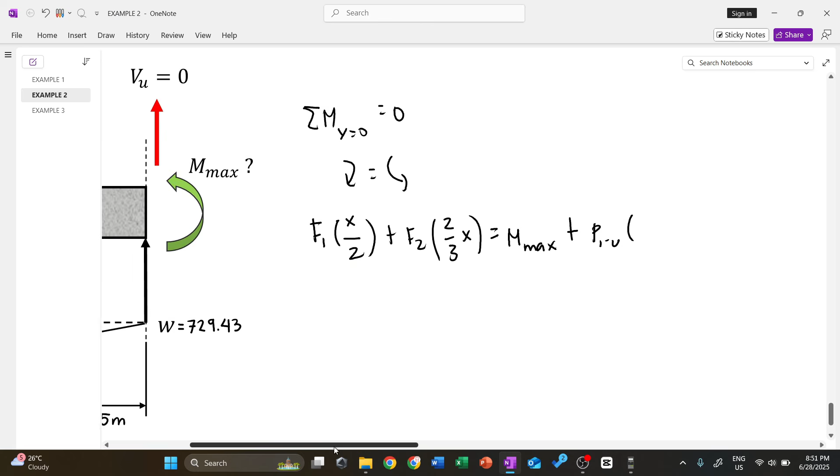Lagay natin dito Mmax, then plus, meron pa yung P1U. P1U times the moment arm. Yung moment arm ni P1U from the reference ay simply equal to x na distance, ibawas lang natin yung kalahati ng ating column. Again, 0.4 by 0.4 yung ating column, so meron ditong ibabawas na kalahati, 0.2. So the moment arm is simply x minus 0.2. Ito na yung ating working equation to finding the value of the Mmax.

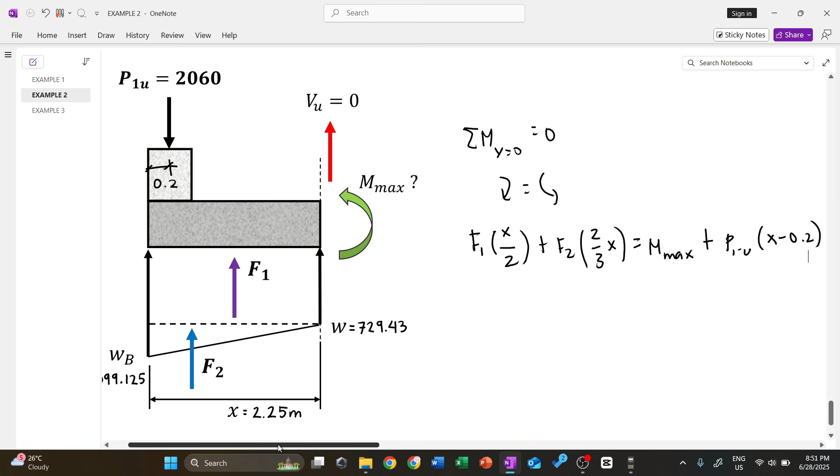Kaya lang, unknown pa ang magnitude ni F1 and ni F2. So by solving first yung ating mga forces dito, this is simply the area nung mga nakikita natin. Para sa F1, dahil ito ay rectangular, the shape is simply W para sa height times X para sa kanyang base. Yun yung area na nabubuo, and that is the magnitude of the F1. Kung isa-substitute natin dito, this is kilonewton per meter.

We have here 729.43 times yung X natin na 2.25. Kilonewton per meter times meter magiging kilonewton. So meron tayo ditong 729.43 times 2.25. Meron tayong F1 na 1641.22 kilonewton.

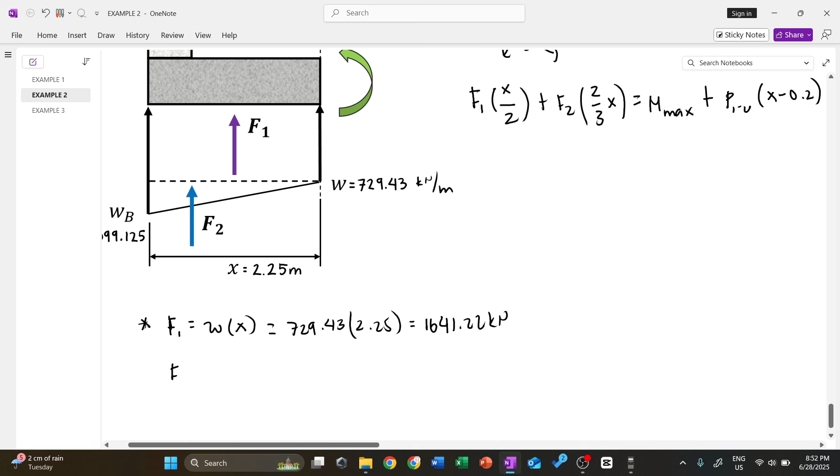Next, F2 naman tayo. Yung F2 natin ay triangle, so this is simply 1/2. Yung base natin ay yung X, times yung height natin ay simply the difference of WB and W. Yung delta dito if ever man meron, yung delta again is WB minus W. So the area of this triangle is simply 0.5, X natin is 2.25, times yung W natin dito 1099.125 less 729.43.

So meron tayo ditong F2 na 415.91 kilonewton. So may mga magnitudes na tayo ng F1 and F2, pwede na nating isolve yung ating Mmax. F1, this is 1641.22 times 2.25 over 2, plus 415.91 times 2/3 of 2.25, is equal to maximum moment plus yung P1U natin na 2060 times quantity 2.25 minus 0.2.

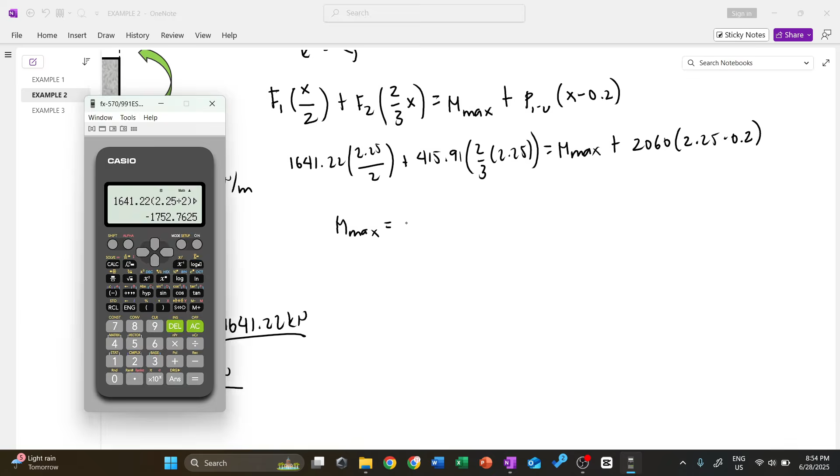At meron na tayo ditong Mmax na equal to: 1641.22 times 2.25 divided by 2, plus 415.91 times quantity 2/3 of 2.25, minus 2060 times 2.25 less 0.2. So meron tayo ditong magnitude ng Mmax equal to negative 1752.76 kilonewton meter. Yung negative lang dito indicates na mali yung direction na inassume natin, so i-correct lang natin, dapat siya ay clockwise direction. Finally ito na yung sagot natin for the maximum moment.